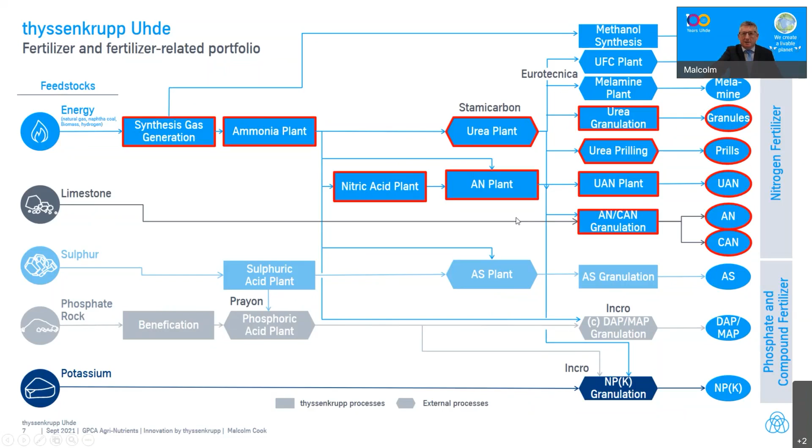So just to concentrate on a couple of them, the ammonia and the urea as part of this chain, from synthetic natural gas or green hydrogen through to ammonia, through to urea, and then the granulation and prilling side. So a little bit about the technology. Either starting from natural gas, and you can see the amount of natural gas per ton of ammonia, or from the electric power. And this is from green electric power or renewable power.

So it's looking at two options, either purification right through, and this is the classical natural gas purification, synthesis loop to ammonia. And the co-product or byproduct for this is CO2. And we're seeing the market is looking at how we can decarbonize that. So either carbon capture and usage, or carbon capture and storage. Carbon capture and usage, making things like urea, making things like methanol, and the storage is in this region being used for enhanced oil recovery.

For the green ammonia, it starts with renewable power. Then we use electrolysis to make the hydrogen, an air separation unit to give us the nitrogen, and that goes into the synthesis loop, and there's ammonia. At the moment, I would say the top one is cost advantaged, but the second one, particularly with the drive towards a reduction of renewable power cost, is becoming increasingly attractive in this region. We're seeing power of approximately 1 cent per kilowatt hour for renewables in this region. So that's driving the green ammonia.

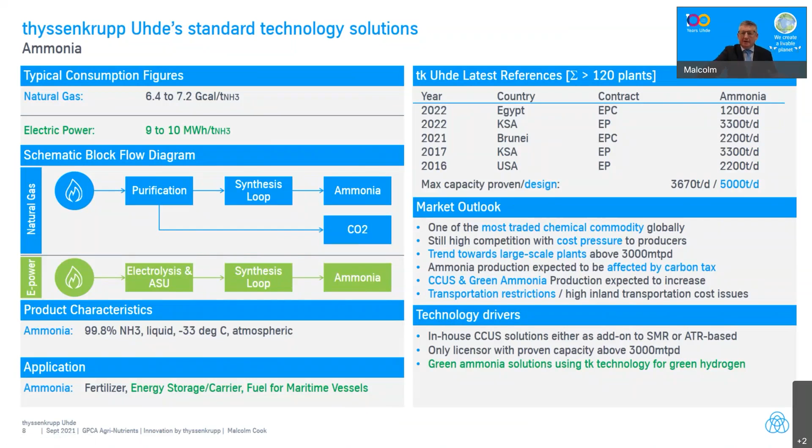And we're also going to see an impact of carbon tax on ammonia, particularly in Europe, where we're seeing carbon tax being introduced. And the trend we're seeing generally is towards large-scale plants. In our case, that's above 3,000 metric tons per day. And we've got the capability to design plants to 5,000 tons per day and beyond. And the green ammonia, we can deliver that out of one hand with our technology for green hydrogen. But that's a general market trend, everyone looking towards green ammonia.

On the urea side, with the cooperation with Stamicarbon, if you look at the outlook, it's one of the most traded chemical commodities globally. We see a high demand globally, but particularly in Asia, Africa, and Latin America. We're seeing now urea moving a little bit from commodity product into specialty products with controlled release, slow release products, and also the ability to add different nutrients, so sulfur and other micronutrients into the product.

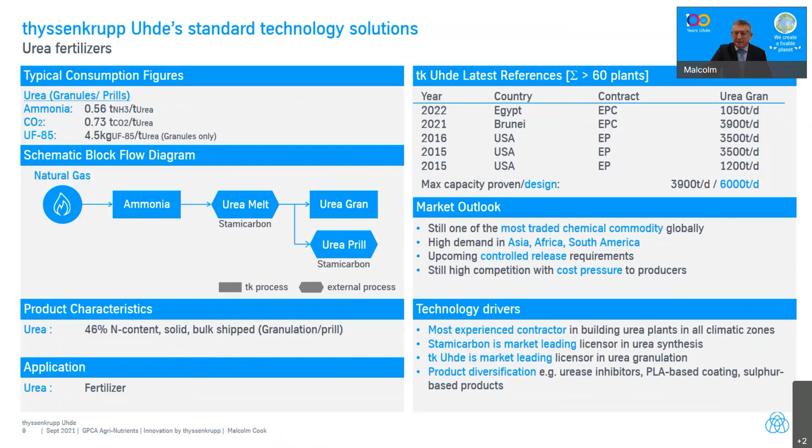So moving on, digitalization. We all know the impact of digitalization and how that's accelerated on our lives, particularly during the COVID crisis. Unfortunately today I'm talking to you digitally. I prefer doing this face-to-face, but we recognize that digitalization is very important and a growing trend for all of us. And it does offer some exciting opportunities. We've always had the human experts, and now we've got the computing power and the machine learning to bring the two together. So we're looking at the combination of human and artificial intelligence, and that's driving new opportunities for all of us.

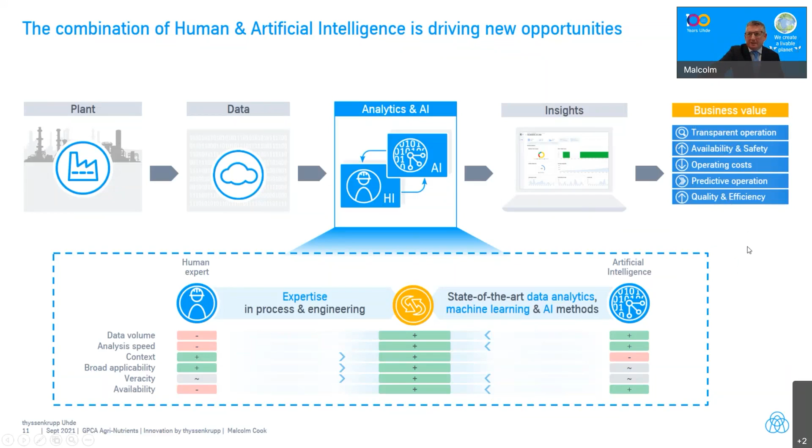Looking at the details, it's a combination of the plant, where we have the experts, and these are data experts as well as technology experts. Particularly the data experts bringing in data visualization, analysis, and analytics. The customer is the expert from the side of their plant, knowing how it operates from the DCS right through to logging the data that's produced. So it's a combination of on-site access backed up with the service engineers and backed up with the data scientists and experts in that area.

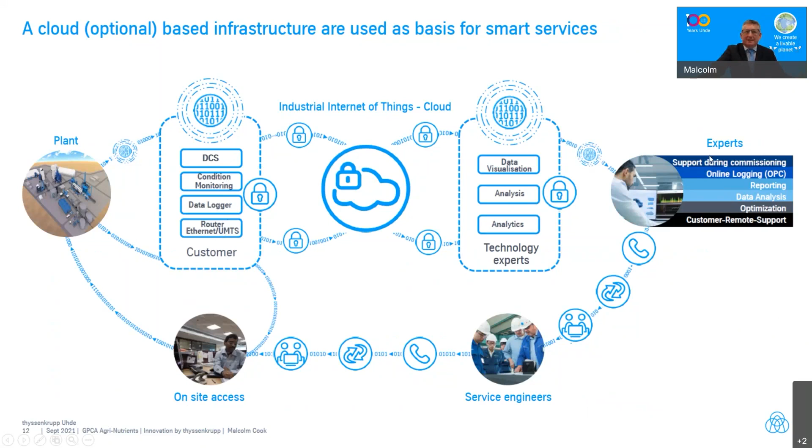So a few different areas that the market's looking at. We're looking at data analytics and consulting. So this is regular reports and really driving further value out of those reports and getting deeper into the operation of that. So it really then uncovers things that we weren't able to look at in the past. So looking at inefficient processes and how we can improve that.

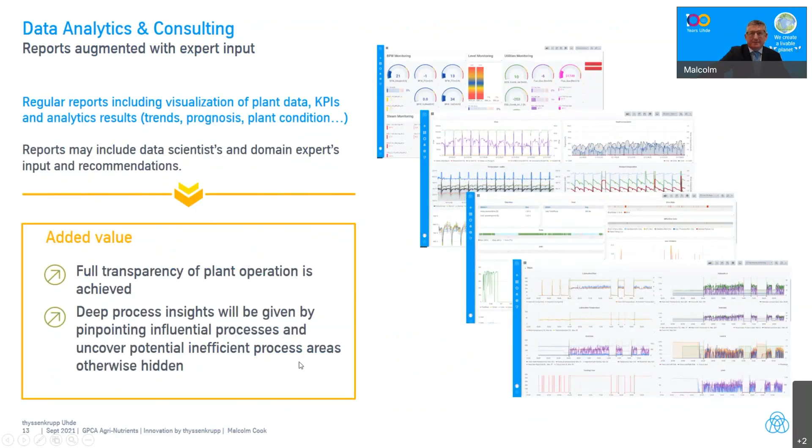So predictive maintenance, we're all interested in predictive maintenance. So how we can get the plants running longer, how we can avoid unplanned shutdowns. And in some areas we have taken reformer tubes, catalyst activity, or heat exchanger fouling. So looking at that from a predictive point of view. So it's all about reducing the cost and time, added value, and then it's really, we use this word a lot, transparency, making sure we have data-driven decisions and avoiding unplanned shutdowns.

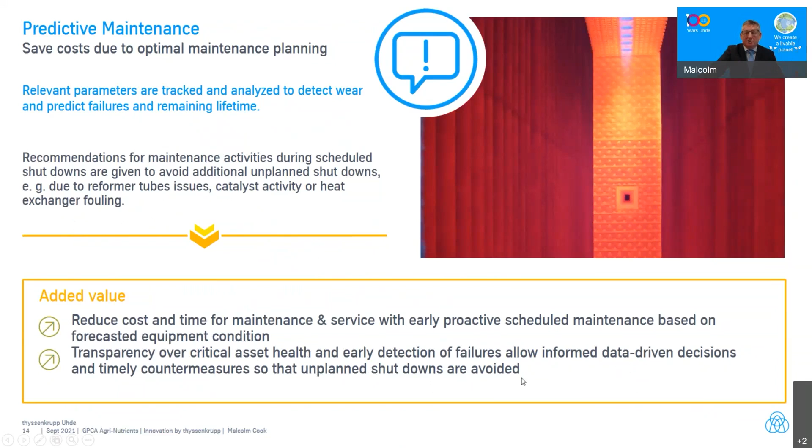Digital twin, this is an area I'm quite excited about, having seen it, how it behaves and how it reacts. So this is having a virtual twin of the plant that uses the learning from real data and allows us to simulate different scenarios, how to do operator training, how it looks at the prediction of that. So it really assists the operator to identify different conditions.

So in this region, we quite often see different conditions from summer and winter, where we have differences in cooling water temperatures, as an example. So it's looking at that, how do we model that, and then how do we move from one scenario to the next very quickly, but still maintaining the operating window for the plant.

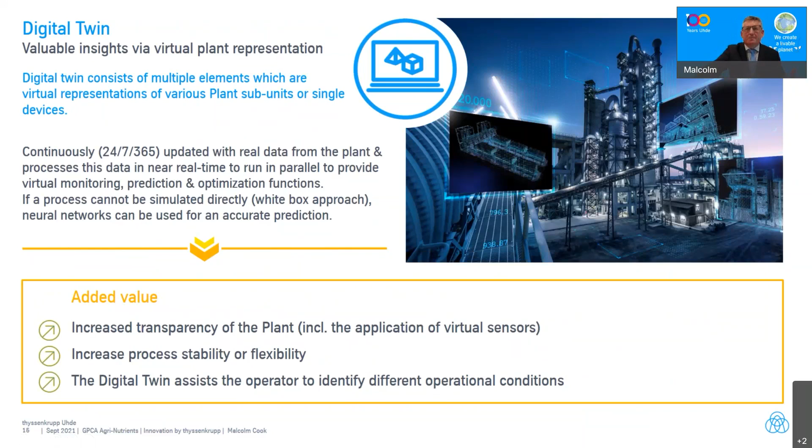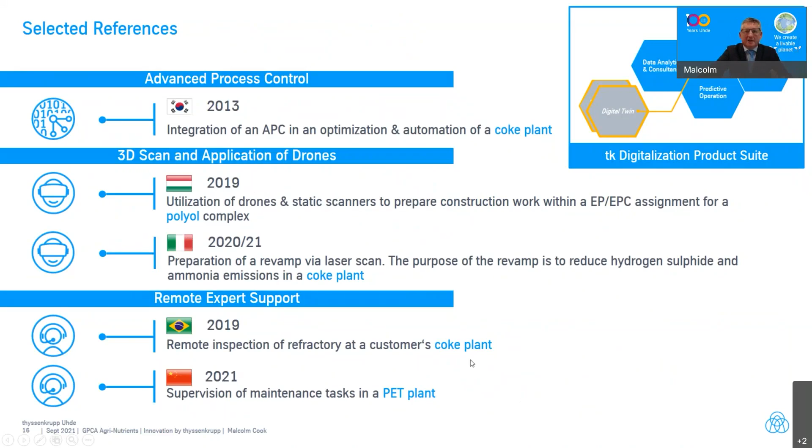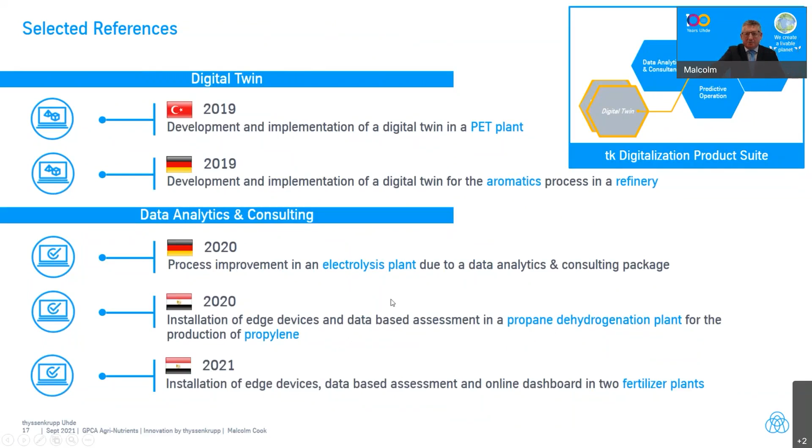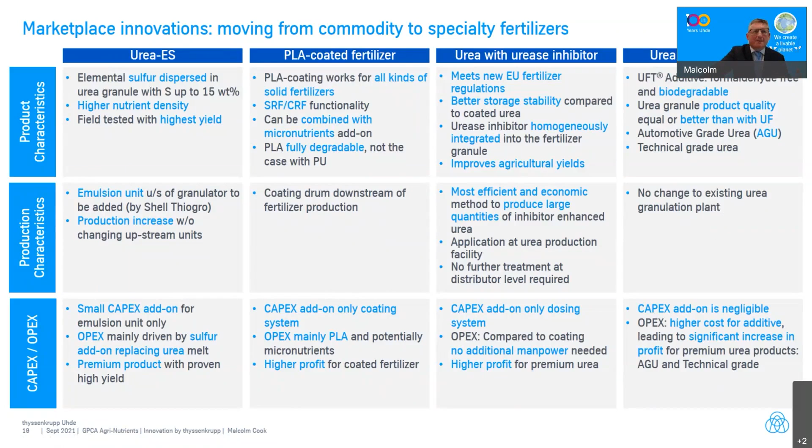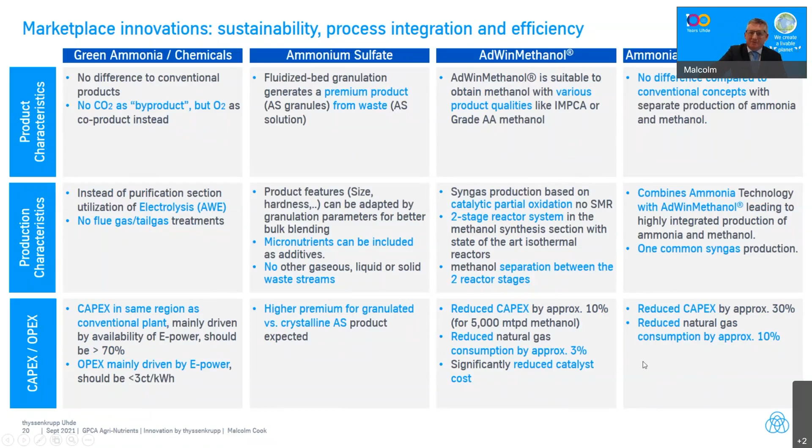And then process intensification. We've got things like methanol plants and the advances of that. Ours is branded AdWinMethanol. And then looking at co-production with ammonia and methanol together. And you can see some of the advantages of these.

The summary, market trends. The Middle East has always been a competitive region, particularly due to its low gas prices. But we know we can't rest on our laurels here. We have to continue to develop and continue to look at these trends, to move into specialty or niche fertilizers, as well as producing the commodities at the lowest price possible. We talked about carbon dioxide trading and looking at taxes and certification of products coming in the future, and that's a big topic for debate at the moment.

The high yield fertilizers, we touched on the slow and controlled release. We've always looked at process integration and efficiency, something we always do. Digital solutions in many cases have been seen as an add-on, but for us, they're embedded into the standard technology offerings, and we're seeing that moving through in the marketplace. And last, by no means least, is the green ammonia or green fertilizers, either by electrolysis, or blue via carbon capture, utilization and storage. So that's the market trends, product development, sustainability and digital-based solutions.